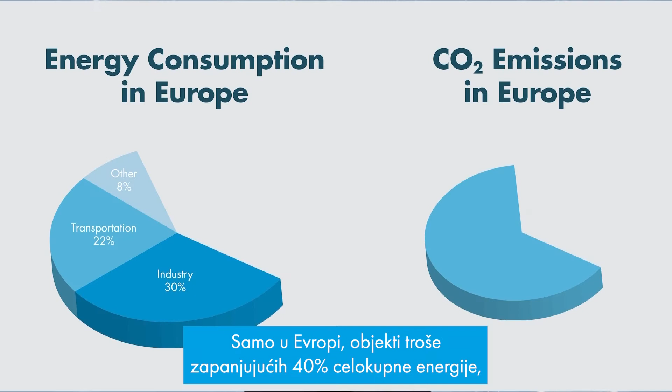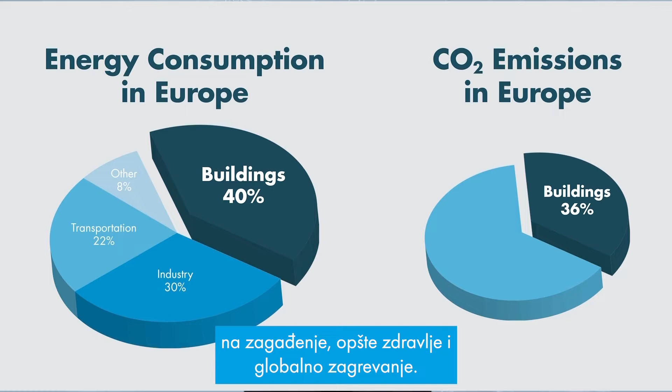In Europe alone, buildings consume a whopping 40% of all energy, mainly for heating and cooling, and they are responsible for 36% of Europe's CO2 emissions, which have a negative impact on pollution, general health, and global warming.

Furthermore, 75% of these buildings are not energy efficient, and 85 to 95% of them are expected to still be standing in 2050, also leading to significant operating energy costs.

Energy poverty is a pressing problem worldwide. Even in Europe, more than 34 million people cannot afford to pay their energy bills and live in unhealthy, uncomfortable conditions.

At Knauf Insulation, we believe our buildings should be fundamentally energy efficient and provide the much-needed thermal comfort their occupants deserve. Let us take a look at how outdoor temperatures challenge our lives and how we can help save energy, protect the environment, and ensure healthy and comfortable buildings.

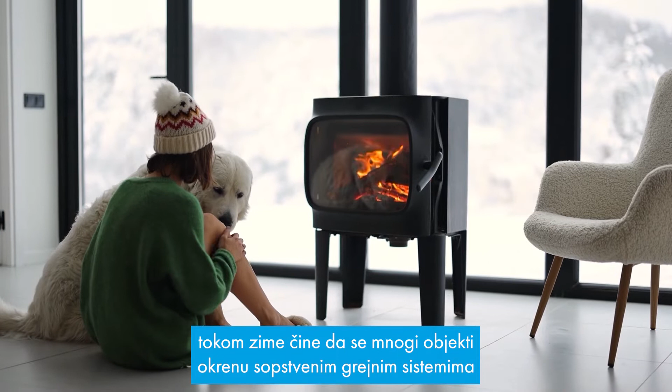Depending on geographic location, lower outdoor temperatures in the winter force many buildings to turn on their heating systems to keep people warm. Since most buildings are older, lack proper thermal insulation, and are energy inefficient by today's minimum standards, much of the heating energy escapes through the building envelope and is wasted.

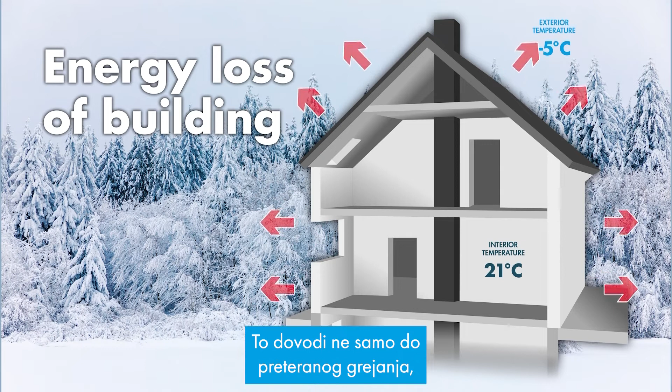In such buildings, unwanted drafts and radiating cold from uninsulated wall, floor, and roof surfaces are common. This not only leads to excessive heating, but also low thermal comfort, making us feel stressed, annoyed, distracted, or even sick.

More importantly, excessive cold or hot indoor environments are unhealthy, especially for the elderly, sick, or infirm during harsh winters or severe heat waves. Over the last decade, a shocking 250,000 elderly people have died from cold weather in the UK alone. That's one elderly person every 7 minutes. At the root of this problem are cold, poorly insulated homes.

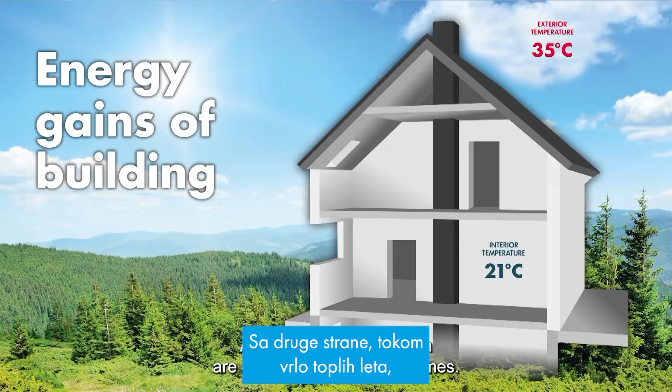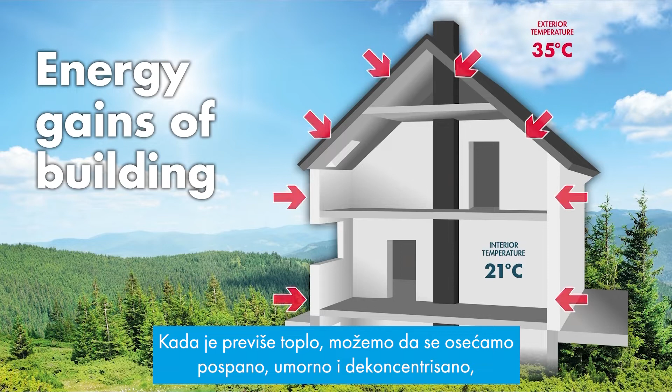On the other hand, during high-temperature summers, many buildings tend to dangerously overheat. When it's too hot, we can feel sleepy, tired, and unfocused, which in turn leads to low thermal comfort. This is particularly important if occupants are elderly, very young, or suffer from cardiac, kidney, or respiratory diseases.

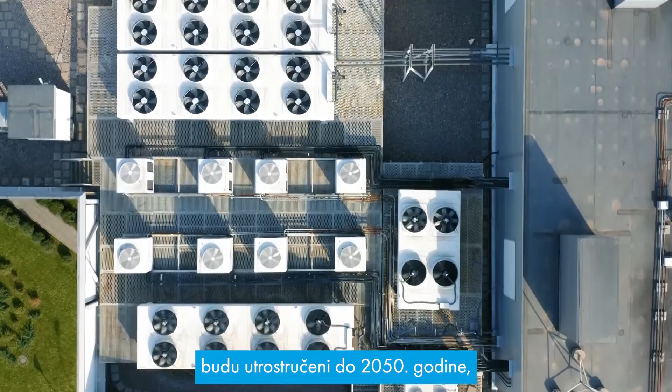In the UK, for example, 1 in 5 homes already overheat. In North America, more people are killed by heat waves than any other natural disaster, according to the National Weather Service. As temperatures rise, demand for air conditioning is also expected to triple by 2050, leading to higher energy costs and emissions.

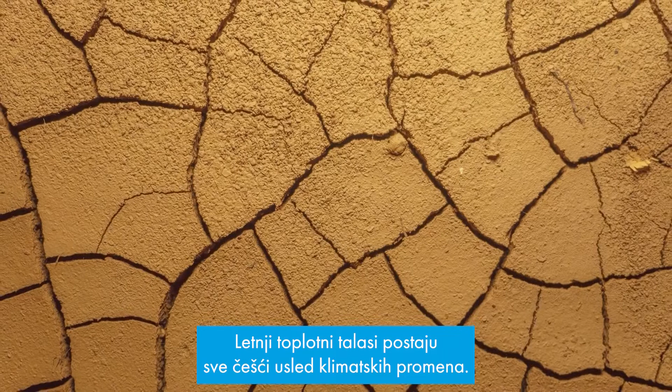Summer heat waves are becoming more frequent due to climate change. If we want to future-proof our world, it is imperative that we rethink how we design our buildings. Why does this happen? Physically, heat always moves from areas of high temperature to those of lower temperature.

Therefore, when the outside temperatures are cold in the winter, heat inside the building will try to escape through the major structural elements such as walls, windows, roof and floor, including through ventilation and leakage losses, as well as through thermal bridges. However, this also occurs in summer, when hot air enters the building from the outside, resulting in a warmer indoor environment. This heat flow occurs through conduction, convection, and radiation.

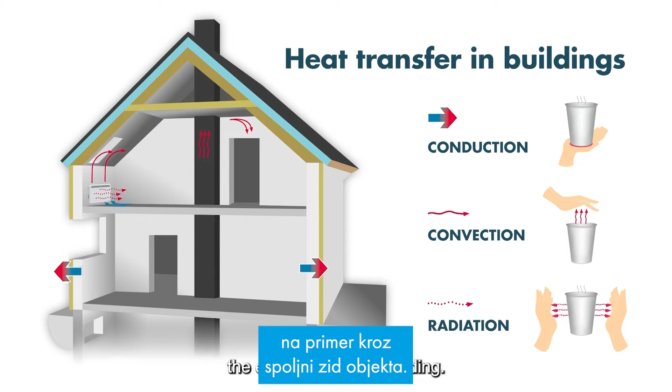Conduction is the transfer of heat through a material or from one material to another by direct contact, for example, through the exterior wall of a building. Convection occurs in gases and liquids, such as the heat that rises from radiators in houses.

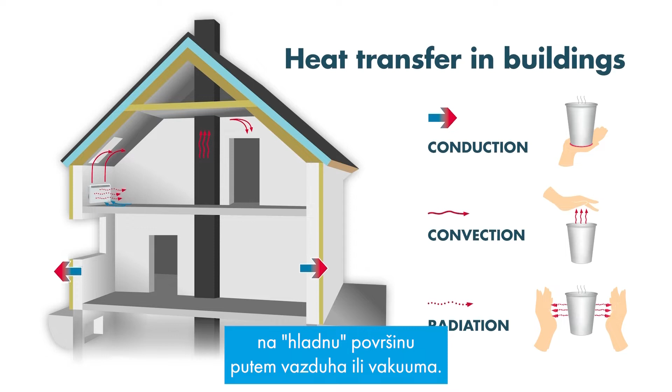Radiation is the transfer of infrared radiant energy from a hot surface to a cold surface through air or vacuum. An example is the radiant heat we receive from the sun or a heated fireplace. In a typical uninsulated house, about half of the heat generated inside is lost through the walls and roof, making them the two largest causes of heat loss.

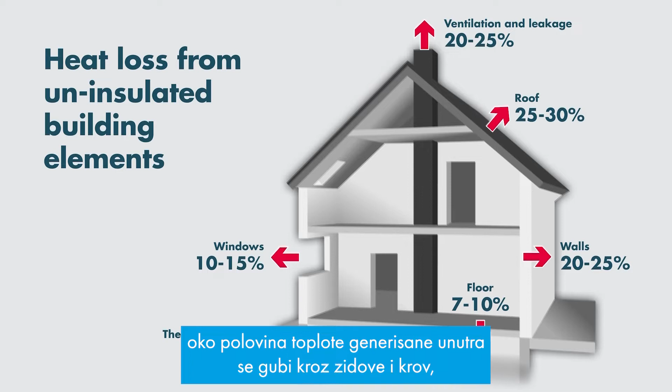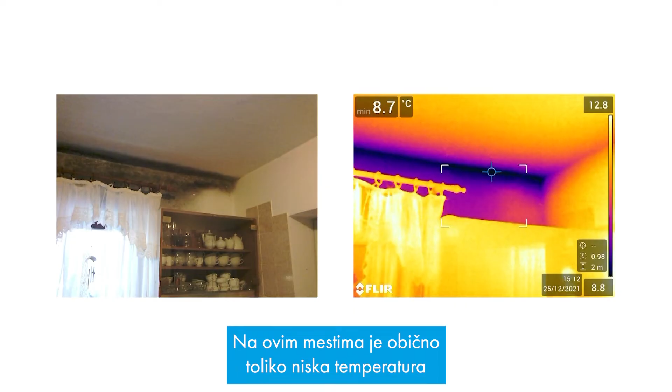Thermal bridges are localized cold surfaces in buildings with additional heat loss, usually due to joints or penetrations of different building materials and elements. These places usually have such a low temperature that the warm indoor air starts to condense there, attracting unwanted mold and other microorganisms.

The common factor that allows excessive cooling or overheating of buildings with high energy consumption and low thermal comfort is a building envelope with insufficient thermal performance. How can this be resolved?

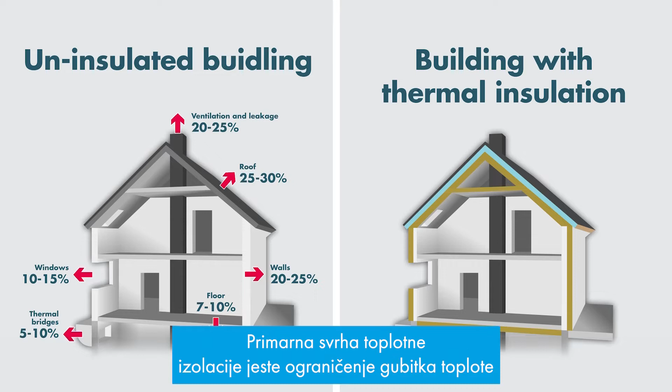The first and most effective step to address these problems is to improve the energy efficiency of buildings, especially building envelopes, by installing sufficient and appropriate thermal insulation. The primary purpose of thermal insulation is to limit either heat loss or heat gain through a building exterior envelope, as it has low thermal conductivity. Thermal insulation provides many vital benefits.

It plays a huge part in keeping the temperature inside the building constant throughout the year by keeping the heat out in summer and protecting it from the cold in winter. A well-insulated building requires far less heating or cooling and is therefore more energy efficient in the long term, saving money and reducing emissions at the same time.

Continuously and correctly installed thermal insulation is also the best long-term solution to ensure overall thermal comfort, as it improves both the ambient temperature and the radiant temperature of the interior surfaces. We perform better and feel healthier when we are comfortable. Large-scale, deep renovations of buildings and energy-efficient new buildings are excellent tools in the fight against energy poverty as well as climate change, two major interconnected challenges.

Thermal resistance is the most important material property that should be defined when specifying insulation materials. It is determined by the thickness of the insulation and the thermal conductivity of the material. In general, the greater the temperature difference between the inside and outside of a building, the greater the heat flow and the thicker the insulation layer must be to reduce heat flow.

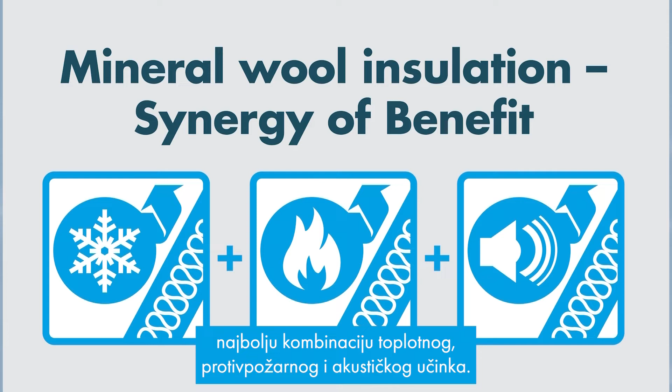There is a very wide range of insulation materials on the market. Thermal insulation of buildings has to be very carefully chosen and detailed to ensure that it offers the best synergy with acoustic and also fire performance. Due to its nature, mineral wool insulation provides the best combination of thermal, fire safety and acoustic performance. It is also easier to install as the fibrous structure of the material fills the space, meaning that any imperfections in installations are negated and therefore give a better real performance.

Mineral wool insulation slows heat transfer by convection, conduction and radiation thanks to its interwoven structure. The inside of the material is made of millions of tiny air pockets that trap any heat or cold that tries to pass through, making it one of the most efficient materials to insulate any building.

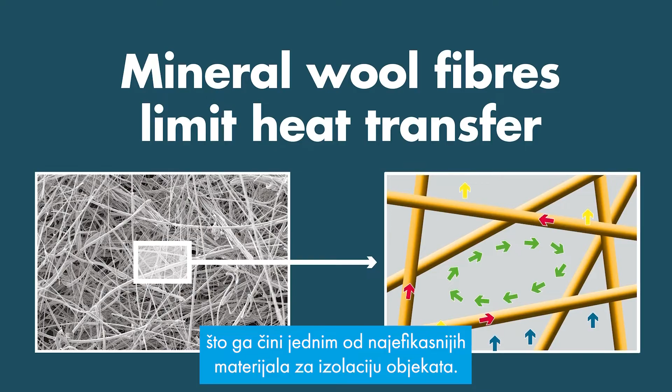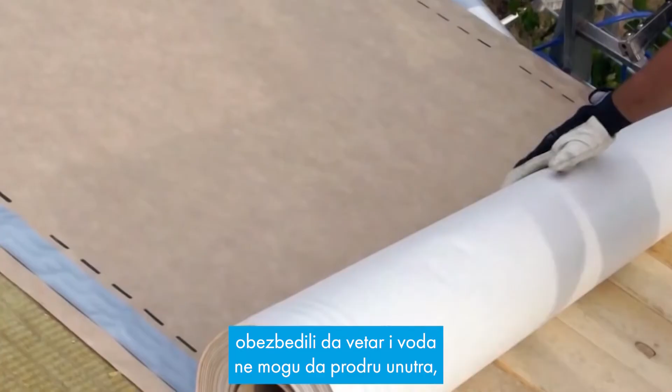To maximize the performance of insulation, it is important to also ensure that the building envelope is airtight. This means sealing uncontrolled leaks of heated air through the building envelope, such as gaps at window frames. On the outside, we can use weather membranes to ensure that wind and water cannot penetrate, but water vapor can escape to avoid the risk of condensation. On the inside of the building envelope, the air sealing function of the membrane is often combined with vapor control function.

Building regulations set out minimum standards for the thermal performance of the building thermal envelope, which means roof, wall, floor, windows and doors, by reference to limiting U values and total energy consumption of the building based on climate conditions. However, when it comes to insulation installed for the lifetime of a building, it is advisable to far exceed the minimum standards, as a well-insulated building envelope brings many long-term benefits and ensures a future-proof building design, resilient to future changes in building codes and climate changes. A well-insulated building will passively provide high thermal performance, comfort and energy efficiency without the need for maintenance.

Regulation must be the driver to accelerate and mainstream energy retrofits of the existing, highly inefficient building stock around the world. A good example is the European commitment to at least double the renovation rate over the next 10 years and renovate 35 million buildings by 2030. In addition, from the beginning of 2021, every new building in Europe must be a nearly zero energy building.